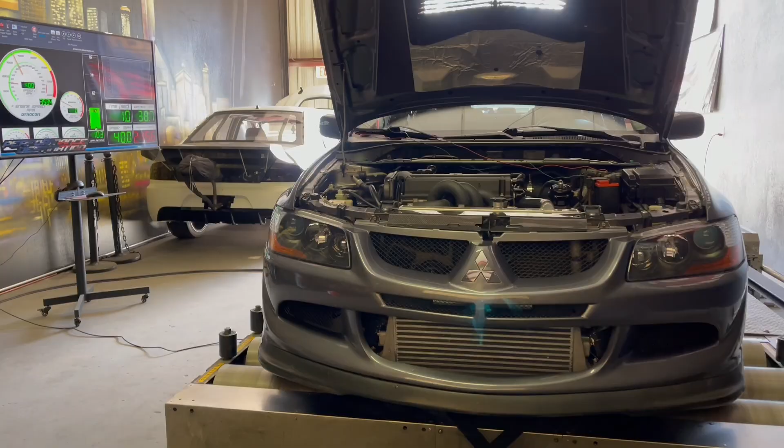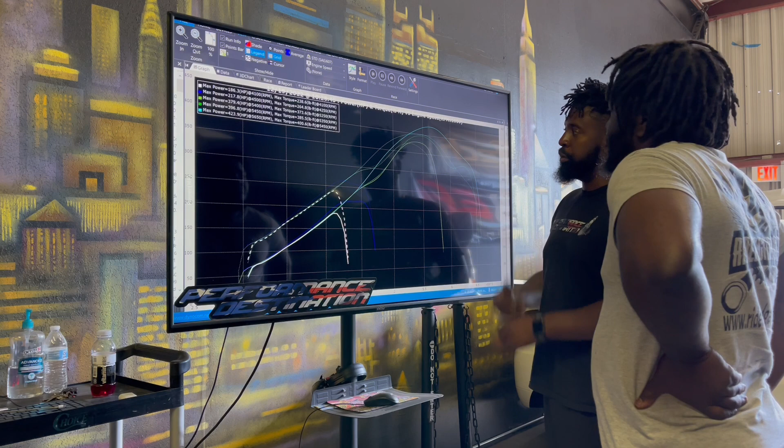Pulling fuel out, pulling fuel out. You can see it'll build up and it'll start falling. Pulling fuel out, pulling fuel out. And I got it now where it's coming on and it's hitting strong.

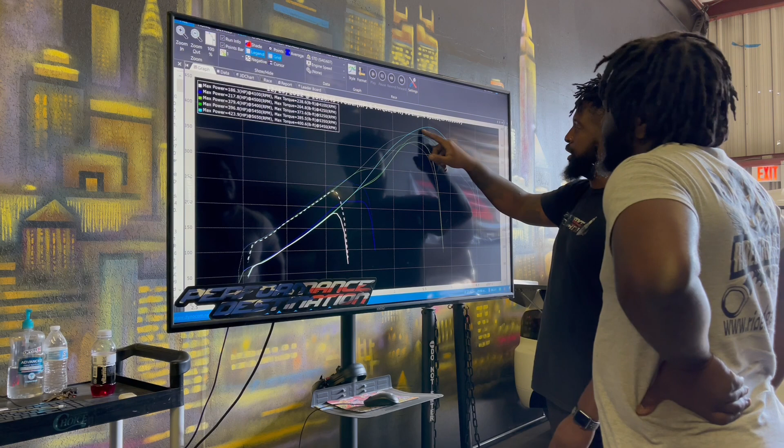My laptop is almost about to die. Before I do one more pull, I wanted to give it a little charge, because every run I'm doing, I'm data logging. And I'm letting off. I haven't even got to the red line yet. So I'm letting off. I just want to start working up in increments.

I saw it get a little bit richer up in here, but once I pull fuel out, this whole thing is probably going to go like this. Probably going to shift a little bit better, right? Everything else looks good. Just take a little bit of fuel out of the top end. I think it'd be perfect.

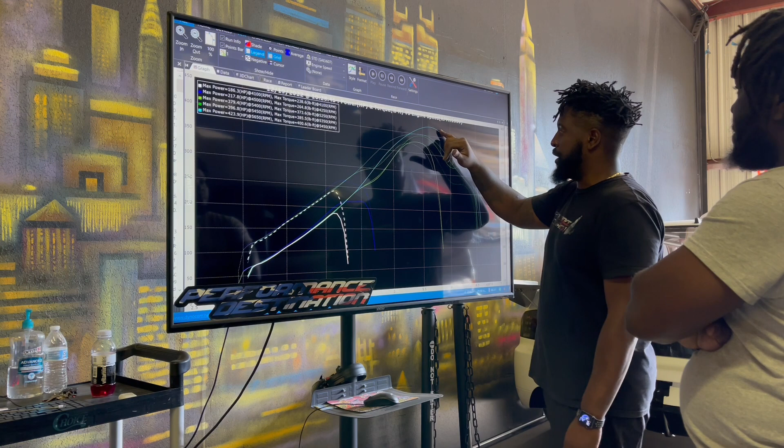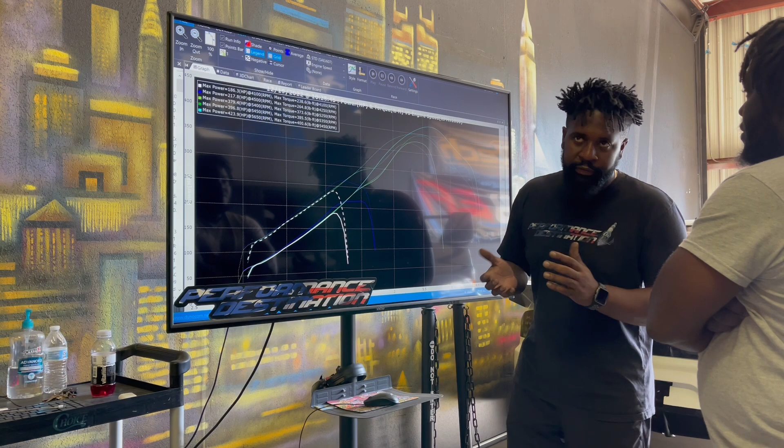So I also kept in mind, like you said, the cold start dying, any of that kind of stuff. I'm already presetting it up so you don't have that problem when you wake up in the morning. Even though it was kind of an E85 situation, and now it's not E85, there are idle settings for the idle air control valve to compensate, so it doesn't do that. I have it already set up in a way so I think it should be good.

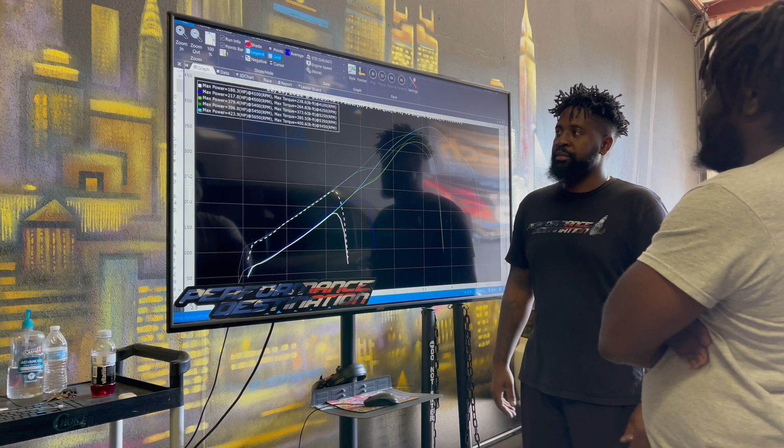Besides that, I can hit it, I can hear it. It sounds healthy. At first I thought it was just the battery. If you think it's the voltage, don't get me wrong, it could be. The voltage will be a lot lower because the car sat overnight and hasn't been charged by the alternator. If I was able to data log, turn the key on, see the voltage, and then crank it and watch where the voltage is at, it's probably pretty low in the morning. And then after it charges itself up, it's gonna be higher.

Like I said, I don't like voltage when it's dancing around. I like it to be consistent. So definitely full size. If you've really got one on the way in the future, go in the back, go full size battery on one side.

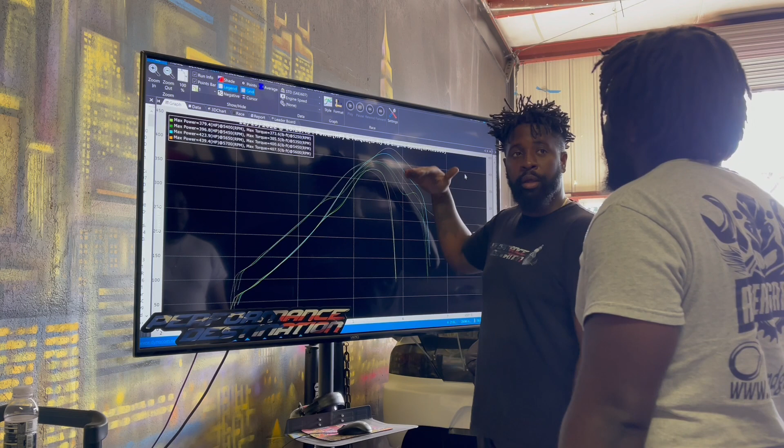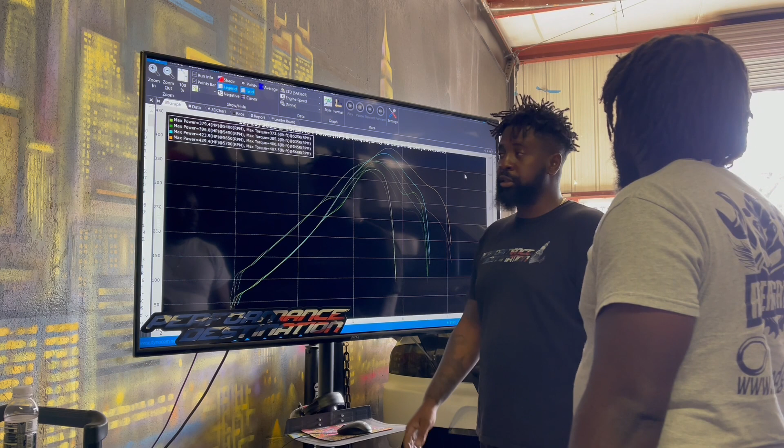That's how I tune, based off the power band. I tune based off the curve. I shape the whole curve how I want the car to feel, depending on what you tell me. If you tell me it's a street car, autocross car, drag car, that's where I put the power. So I think we're good where it's at. Drivability was phenomenal. I'm gonna unload it and we'll take it for a test drive right here real quick, see what it feels like, and then be on your way, man.

Test it out. Feel the difference? Yeah, definitely. Before, I didn't get that feedback that I just got now. That power band, I didn't get that at all. You feel it now. I felt it pull, but I didn't get the power band whatsoever.

All right, man. So you won that car on a raffle giveaway, and now that the car is tuned, how was it feeling beforehand, and how is it feeling now? Night and day difference. What kind of issues were you having before? The power was there, I just wasn't getting the feedback that I wanted from it. So the power was there, but did it hit hard? It didn't hit hard at all. It was steady, but it wasn't hitting hard.

What kind of drivability issues were you having? With the E85, I had cold start problems. I had issues with fuel, but now it's all good. So when we went for that test drive just now, how did that feel? Awesome. Like I said, night and day. Amazing.

All right. This is Desmond from Performance Destination. Customer that just recently won a raffle on this Evo 8. Fairly simple setup. Got some head work, stock block. He didn't want to be on E85. He wanted to be on 93 because there's no E85 where he lives. So we finished today right at 440 horsepower, 407 foot-pounds of torque, and the car is running really strong. He's on an ART 52 millimeter turbo on pump gas, S1 cams, and the car is running really good.